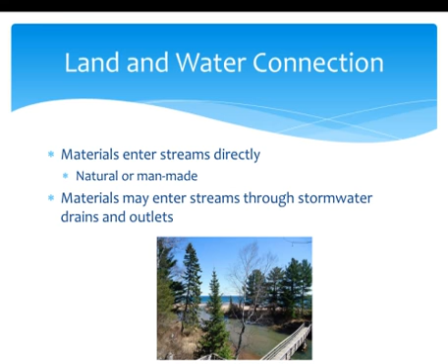But another way materials enter a stream is through the storm drains, and the whole stormwater system is made, again, to remove the water from the streets, and it's going to put it right into streams and nearby lakes. We want to control what goes through those pipes, and more importantly, what goes out of those pipes. We don't want to be in a situation of polluting our water.

So what is illicit discharge? It basically is anything other than the water, rain, or melting snow that can enter what's called an MS4 storm drain. MS4 stands for a Municipal Separate Storm Sewer. In the City of Superior, we are an MS4, and we have this separate storm sewer system, which is separate from our sanitary sewers.

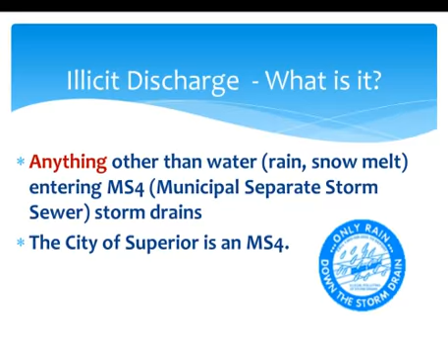Again, the message throughout all of this is we only want rain down the storm drains. What is on the other end of the storm drains? Where does the water and anything else that goes into the storm drain go? When it does enter a storm drain, whether intentionally, where someone has done some illegal dumping, or what's carried by rainwater being washed off the soil, that goes directly untreated to a nearby stream or into Lake Superior. Untreated means it is not going to the wastewater treatment plant.

So again, it's separate - there are two systems. A storm sewer and a sanitary sewer are not the same thing, just as stormwater, water after a storm, is not the same thing as wastewater. Wastewater is what's from your sink, the toilet, the shower, washing machine - those are separate pipes, separate system. And stormwater, in most cases in Superior, does not undergo any treatment. The other side of the storm drains is the lake or a stream.

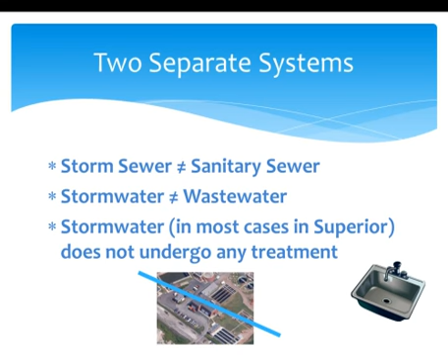So there's the wastewater treatment plant down below, and that is not where stormwater goes to. What's very important is that we all play a role, and that storm drains are for stormwater only. So if everyone recognizes that, then it's a better situation.

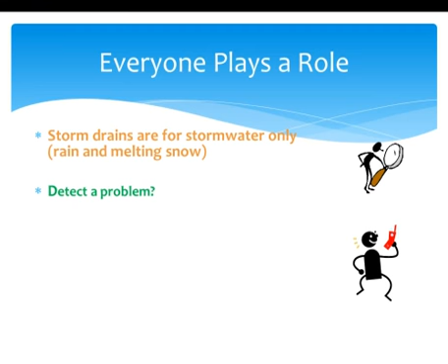So if a problem is detected, whether seeing someone dumping something, seeing suspicious activity, or seeing something specific or strange on the other end—if you're out canoeing or next to a stream and you see the outlet pipe having something suspicious or strange about it, then there's a problem.

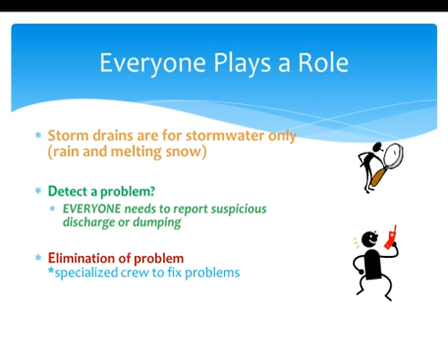As far as eliminating the problem, if the city knows about it, then a specialized crew would go and fix it. We'll be talking about some other clues that there might be a problem. As a city, we also do inspection of the drains, but we can't be at every drain all day long, so it's really helpful for community members to report a problem.

So we're the Environmental Services Division, and because of being an MS4, we have this permit that is mandated by the EPA, and then the Wisconsin DNR checks it. Our ultimate goal is we want the streams and Lake Superior to stay high water quality, very healthy. We want wildlife to not be experiencing algal blooms or any bad toxic conditions. And we also, of course, want human health—we want to swim and participate in the lakes, be involved in the streams and lakes, and we don't want there to be any problems.

So keeping things out of the storm drains is going to involve the city doing different activities, as well as local businesses, organizations, and the community, to keep things out of the storm drains besides the water, and also for detecting a problem and letting us know.

And we actually do training. I gave training over the last year to the Parks and Rec, to street maintenance, to the police department, since there are additional people that are definitely outdoors and out on different streets at different times. We gave a portion of this training to them as a reminder of what to look for if they notice something is not right, and then who to report it to.

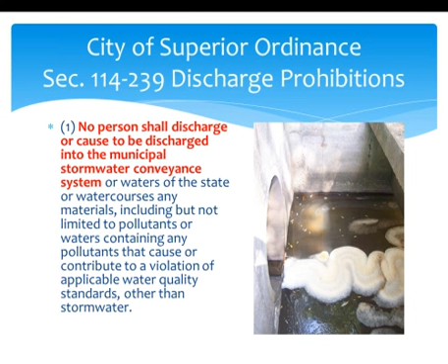The City of Superior does have an ordinance prohibiting discharge into storm sewers. Basically, no person shall discharge or cause to be discharged into the municipal stormwater conveyance system anything—again, they're for rainwater only. So we do not want that, and no one is authorized to do it.

I will actually go into some exemptions for it, however. The following are exempt from being prohibited: there might be air conditioning condensation going in, natural springs, non-commercial washing of vehicles is allowed, and firefighting activities at times can have different materials enter a storm sewer. So this whole list is part of the ordinance for what is exempt from entering the drains.

Another part of the ordinance includes connections—that a person should not have any line connected, no sewage connected to the stormwater conveyance system, or any drain or conveyance that is not documented in plans, maps, or the equivalent. So we do go through and check this, partly by noticing discharge, and I'll go through some criteria—we can become aware of these situations. They're underground and may have been forgotten long ago, but the more we can detect these situations, the more we can correct it.

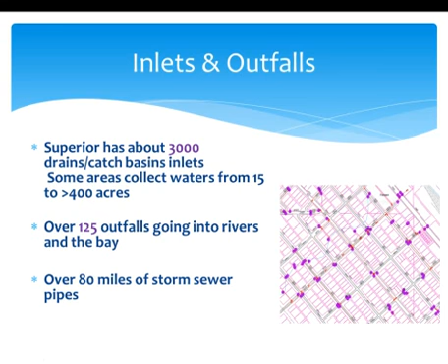One thing about being in a city is that we have more impervious surfaces: more parking lots, roads, roofs, and other materials that don't let water soak into the ground. So when there are more impervious surfaces in an area, there's more stormwater runoff, the rain can't soak in, it runs off. We can't control the rain, it is going to rain, but we can slow down the runoff and help keep it cleaner. Adding natural things like trees, native plants, and rain barrels are ways of reducing runoff, as well as keeping areas with natural pervious surfaces that let water infiltrate down.

Stormwater runoff, non-point source pollution, is a major contributor of pollution to rivers and lakes. Point source is what would come from an industry, and there's more regulation on what is released with that, but non-point source comes from many different ways, whether it's pet waste left on the ground, litter that's swept in, or leaking containers. These can then enter the storm drain and enter a river system.

And we know water is always on the move. The hydrologic cycle has been going on for centuries and centuries, and with water there can be movement of other materials with it. So we always need to be on watch for trying to reduce what water would carry with it. Again, we can't stop the rain, but we can reduce and slow the runoff.

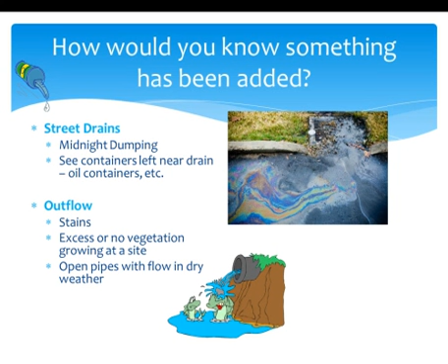Another thing you might not have thought about at an outflow pipe is when the pipe has some flow to it, yet it hasn't rained for a few days. During dry weather, you should not see flowing water out of a pipe. That might be an illicit connection, something wrong, because only during a rainstorm and then a day or two after should there be water coming through, but not beyond that.

Other things you might notice at a site: is there a strange color coming out of the pipe? Is there cloudiness or turbidity? And is there odor? Do you smell something?

What's important for preventing all these things is to take measures to prevent spills, or if there is a spill, have a way to block things from entering a storm drain. Have a designated area only for cleaning, such as taking your car to a car wash. Those drains are set up to handle the soapy water, compared to if you do it on your driveway, then that soap is going directly into the storm drain and out into the lake.

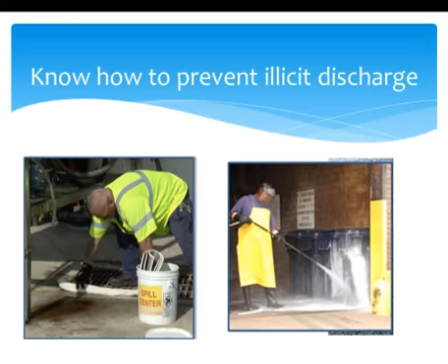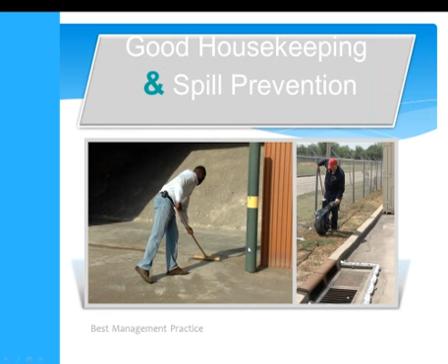Again, preventing spills, cleaning up litter can help keep it from ever reaching a storm drain, sweeping up instead of having dry material that could wash off in a rain. The term is good housekeeping. Here on our earth we want to keep it clean, and there are definitely things we can do.

The city does go out and sample and visually inspect some of the storm drain outlets. Visual inspection includes whether it's cloudy, if there are floatables in it, plant growth or die-off in the vicinity. There's also lab analysis done, testing different parameters.

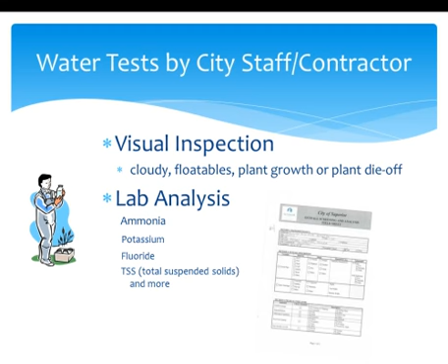We are definitely shooting for proper disposal of materials, which will greatly help prevent pollution. We put together a little disposal guide for how to dispose of materials properly, where to bring it in Superior. Basically, for motor oil, if you change your own motor oil at home, do not—here's Stormy

reminding that the other end of the storm drain is the river. Do not pour any oil down to the river. Places that do oil changes accept it.

Bring mercury-containing products such as fluorescent light bulbs, some other things. And if you changed your thermostat or had an old appliance, these need to be brought to proper locations. We do accept at the wastewater treatment plant here the light bulbs, thermometers, and mercury-containing items.

And WLSSD has a very good material exchange going on, where if you have half a can of paint left, or a little bit of oil, you're moving to an apartment and you no longer need your lawnmower, but you had oil left over—all these things, or cleaning supplies, or paint stain—you can bring that to WLSSD, and then people can come in and actually take that for free as an exchange, and it gets used up.

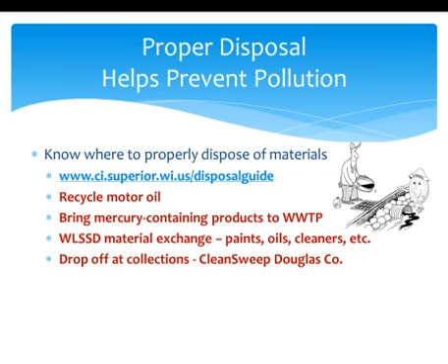Douglas County in June had their annual Clean Sweep, and that collection event included everything from pharmaceuticals to appliances, tires, and many items, as well as household hazardous waste, keeping it away from drains.

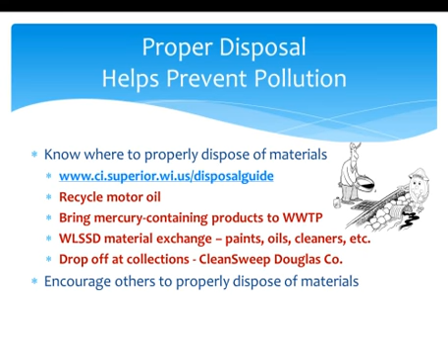Not only can you properly dispose of things, but you can also encourage others to properly dispose of things. Other pollution prevention activities could include not littering and picking up litter. Cigarette butts are a very common item, unfortunately found on beach cleanups around Lake Superior.

But wrappers, cans, all these should be picked up too. Maybe you can organize a group to get more people to come out. In just an hour, you can cover quite a bit of ground.

Picking up pet waste is also an important thing. About 40% of pet owners do not tend to pick up pet waste, and that can be a serious problem. That pet waste can be washed in after a rain down a sewer out to the lake.

Washing your car at a car wash, or even on the grass at least, can help, taking that soap suds either to the treatment plant or slowing it down in the grass so the bacteria and soil can eat it up, compared to going directly down your driveway into a storm drain.

I can't say enough about preventing pollution, but basically as we keep water clean, that is saving money. It's preventing problems—cleanups can be costly. They can lead to beach closures, health problems, so it's better to keep it clean. And then preventing health issues, preventing wildlife effects. So all this, if we prevent problems, it's much better in the long run.

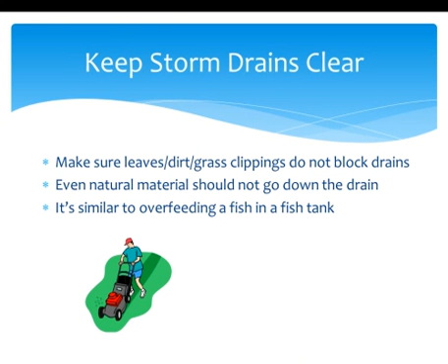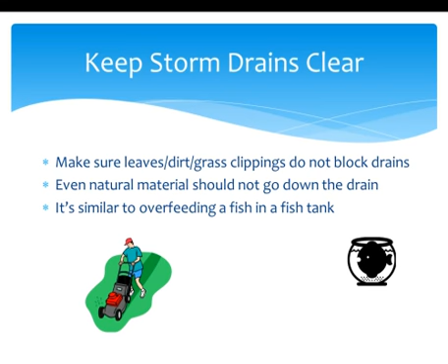Storm drains should also be kept clear. Make sure leaves, dirt, grass clippings don't block the drains so that the drains can do what they need to do of taking the water away. You might not have thought the natural material would be a problem, but it's basically like overfeeding a fish tank. The grass clippings can be nutrients and suck away the oxygen for the fish and reduce what's available. So do not let the grass clippings go down the drain.

We have done a number of efforts on putting messages next to the drains. The city, every time they build a new street, such as out on the new tower project going on North Tower Avenue, they're putting imprints of no dumping, drains to lake. And then we've had youth and the public do some storm drain stenciling for putting messages on the drains.

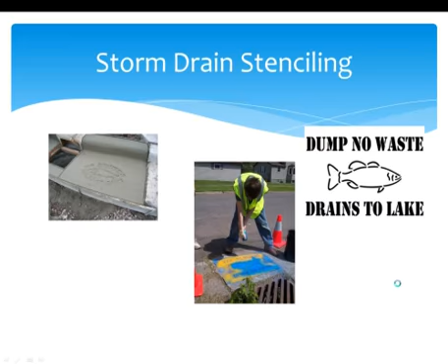So if you notice suspicious flow from a drain, or if you see someone directly dumping into a drain, you need to report the problem, and you will be a part of protecting places and people.

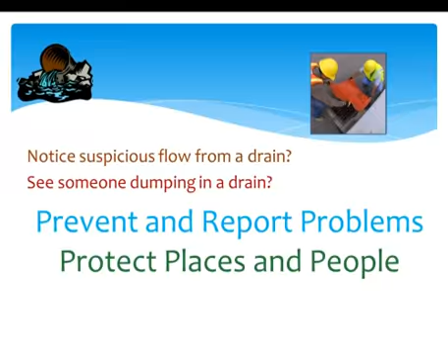And where do you report it to? You report it to us, the Environmental Services Division. We have the direct phone number, and then we also have a special hotline for illicit discharge reports. We have an email of stormwater at the city website, and that's also available as another reporting form. And then we do have an online form on our website. If you just go to the city website and search for discharge, it'll come up as a form, and you can put in the where, when, and what you are seeing.

Your reporting is highly appreciated and part of helping keep our streams and Lake Superior clean. We had the celebration on Sunday, Lake Superior Day, and that's about celebrating this beautiful, wonderful lake that we are fortunate to live by, and we want to keep Lake Superior clean. And the many streams lead into the lake, so we need to keep those streams free of having bad material enter them, because they're going to the lake.

So that was our illicit discharge sampling. I did want to mention additional webinars that will be coming up shortly. The 2 in August include guests at each of those. There'll be a stormwater specialist, Christy, who will talk about surface water, how to slow down water, and protecting surface waters, our streams and rivers.